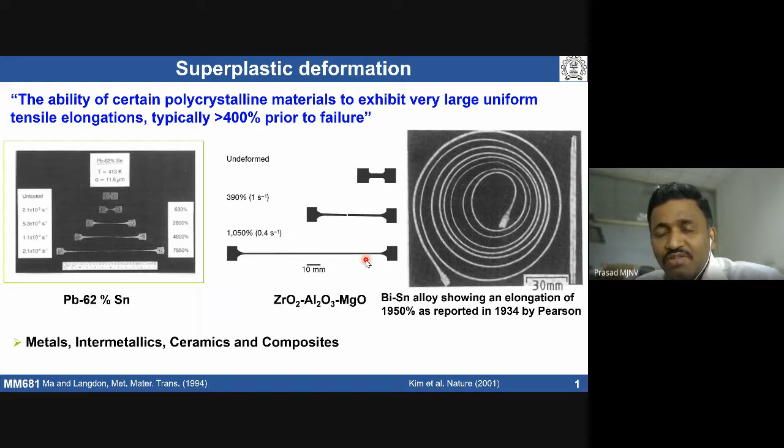The requirements for superplastic phenomenon are basically elevated temperature, fine and stable grain size, high strain rate sensitivity, and resistance to cavitation. These are important conditions the material should exhibit so that we can see superplastic deformation in materials.

If we talk about characteristics of superplasticity, when you deform material at elevated temperatures, usually the materials follow a high temperature constitutive equation at low stresses. This is a typical constitutive equation we see in both creep and superplasticity.

If we talk about characteristic features, making a plot of stress versus strain rate at a given strain and temperature, typically the stress varies in an S-shaped curve. Whereas ductility, or strain rate sensitivity, as a function of strain rate, varies in the form of a bell-shaped curve.

There are three regions: region 1, region 2, region 3. Region 2 is the superplasticity region, which comes from high contribution from grain boundary sliding. Grain boundary sliding contributes to large strains, so a large amount of strain can be obtained.

But when there is grain boundary sliding in a material, discontinuities are going to generate. Those discontinuities have to be minimum, then only you can get large elongations. That minimum discontinuity can be obtained by having some accommodation mechanism.

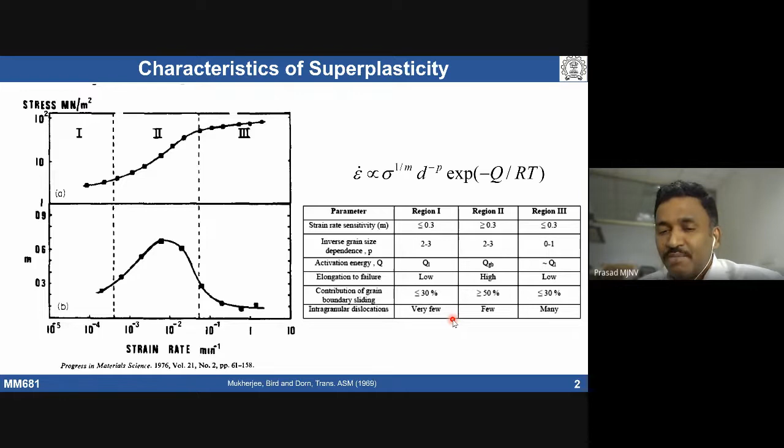The accommodation mechanism can typically be diffusion creep or dislocation creep. Accordingly, we see two different types of mechanisms: Lifshitz sliding and Rachinger sliding. If grain boundary sliding is accommodated by diffusion creep, we see lifshitz sliding, where grains get elongated. If grain boundary sliding is accompanied by dislocation creep, we don't see much change in grain shape - that is called Rachinger sliding.

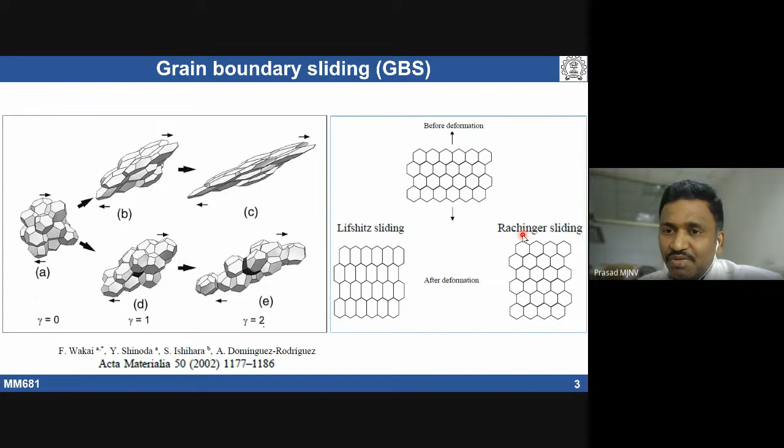So I think these are the things we had discussion about. Then we also discussed the effect of grain size. Typically, with refining grain size, we can get high strain rate superplasticity, which basically means greater than 10 to the power minus 2 per second. If I want to get high strain rate superplasticity, one has to refine the grain size, but at the same time that fine grain has to be stable at deformation temperatures. Then we can get large elongations before failure.

So I think this is about the superplasticity we discussed in my previous lecture. Are there any doubts regarding superplasticity?

Okay, so if there are no doubts, I hope I'm online. Yes sir, you are online. Okay, fine.

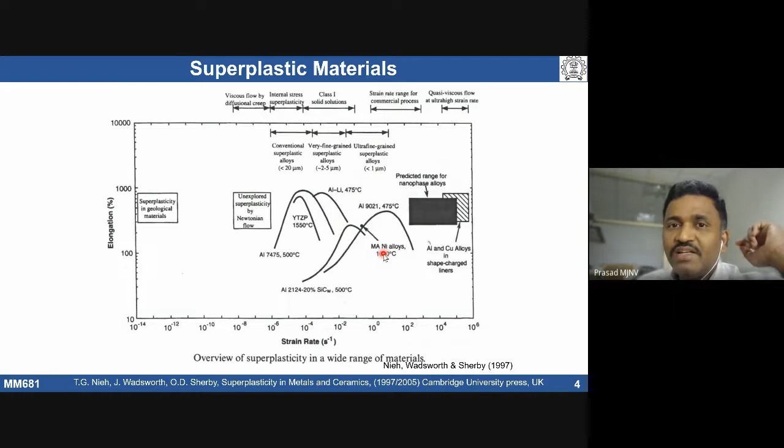So today's discussion is basically related to dynamic deformation activities. If I take a polycrystalline material, assume that it is an equiaxed structure.

If we deform the material, it can have a deformed microstructure like elongated grains. When these have a deformed microstructure, if we heat it to some temperature, it can undergo static recovery - that means whatever dislocations have been generated within the grains can get recovered. Or we may also see recrystallization of the grains, where a fully recrystallized structure can be obtained.

During deformation of a polycrystalline equiaxed microstructure, it will undergo typically elongation. This elongated microstructure can recover during deformation itself, or it can also undergo recrystallization, and you can get a fully recrystallized microstructure. So whatever happens, recovery or recrystallization, these are phenomena which can occur.

If they happen during deformation itself, we call them dynamic deformation activities. Dynamic recovery and dynamic recrystallization are dynamic deformation activities. Whatever changes happen during deformation in the microstructure, those are called dynamic deformation activities.

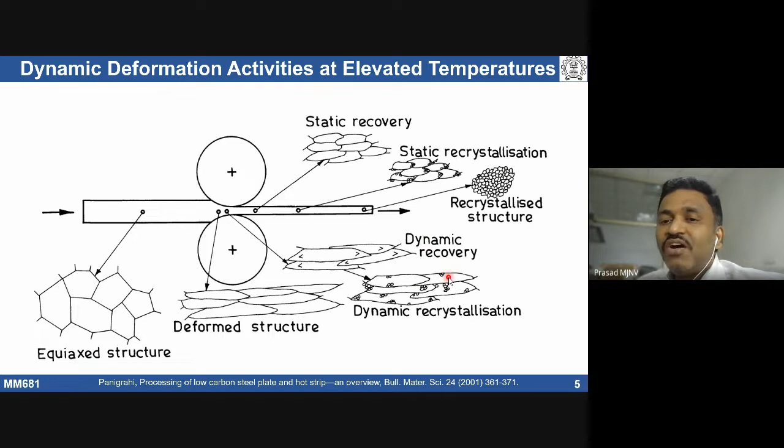So when you deform material at elevated temperature, high temperatures above 0.5 of the melting point, one can expect during deformation itself to see recovery and recrystallization. So these are called restoration processes, dynamic restoration processes. For example, if I deform a material under tension or compression, whatever.

So when you deform a material, depending on temperature and strain rate combination, and depending on microstructure of the material, we may see work hardening, or we may see work hardening plus dynamic recovery, or we may also see work hardening plus dynamic recrystallization.

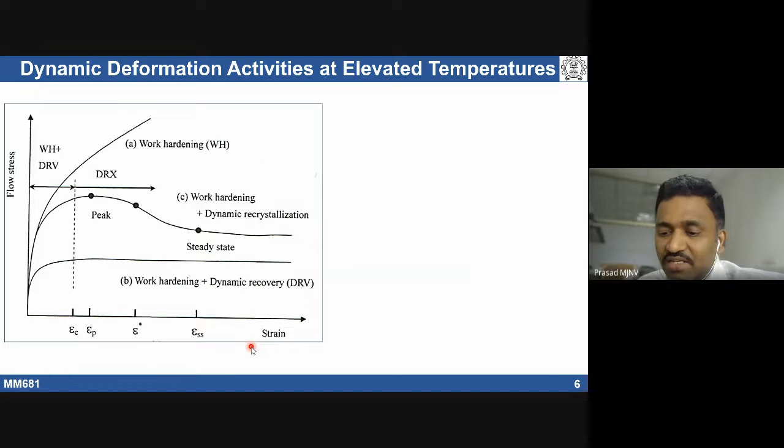So these are basically as far as dynamic restoration processes are concerned. During plastic deformation, we do talk about dynamic recovery and dynamic recrystallization. These two come under the category of dynamic restoration process.

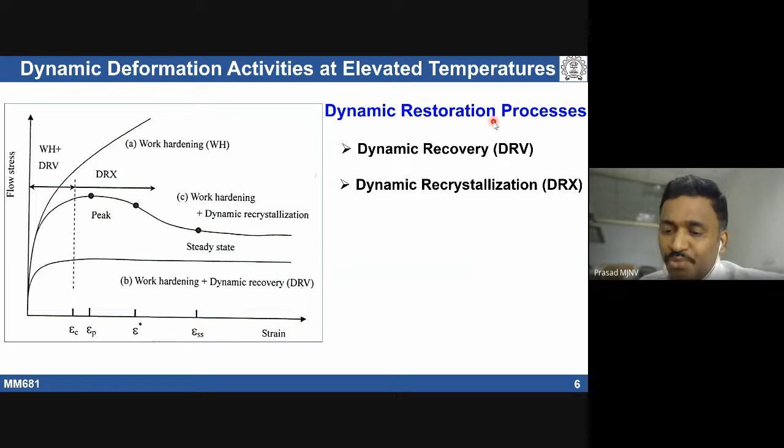So coming to dynamic recovery, the stress strain curve will be like this. What does it mean? Initially there is work hardening followed by a balancing act. The stress basically becomes almost saturated, getting to a steady stress state. What does it mean?

There is recovery, and dynamically there is recovery and deformation and work hardening together happening. So there is a balancing thing happening, that leads to this kind of steady stress state condition with increasing strain further.

So initially there is strain hardening because of dislocation density, and we do see formation of subgrains when you deform material at high temperatures. Initially cells form, then those cells can convert into subgrains. So what happens once we have a subgrain structure?

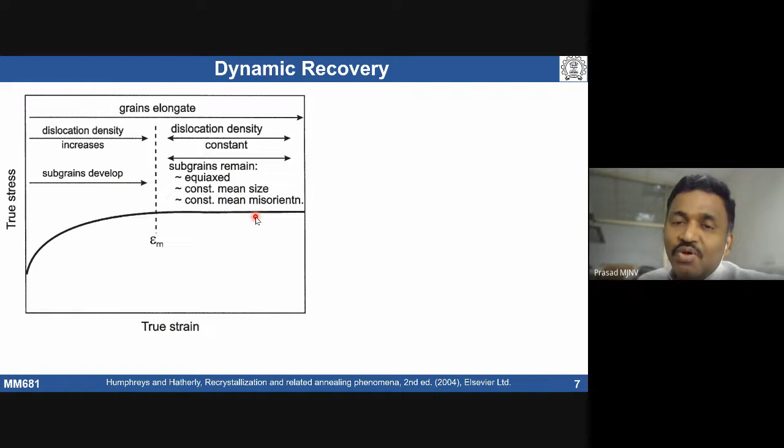Dislocation density becomes almost constant, and these subgrains remain equiaxed and have an almost constant mean grain size, with mean misorientation less than 15 degrees - low angle boundaries. The subgrains will be having low angle boundary character.

So the mechanism by which the subgrains are going to form is basically called polygonization. The mechanism of recovery is basically given by a polygonization mechanism. For example, when you deform a material, there is a lot of dislocation density generated.

And if you take different planes, we do see different dislocations. So what happens during thermal energy - when some thermal energy is provided - dislocations of opposite sign are going to get annihilated easily because of easy kind of deformation activity during deformation, or even with heat.

Dislocations of opposite sign are going to get annihilated, and same sign dislocations are going to form boundaries, get aligned and form a boundary - low angle boundaries. So this is called subgrain formation, formation of a subgrain.

So this whole process basically can happen in static conditions after deformation - if I take it to some temperature, recovery can happen - or during deformation also we can see formation of subgrains. If it happens during deformation, it's called dynamic recovery. If it happens statically, only with temperature, that is called static recovery.

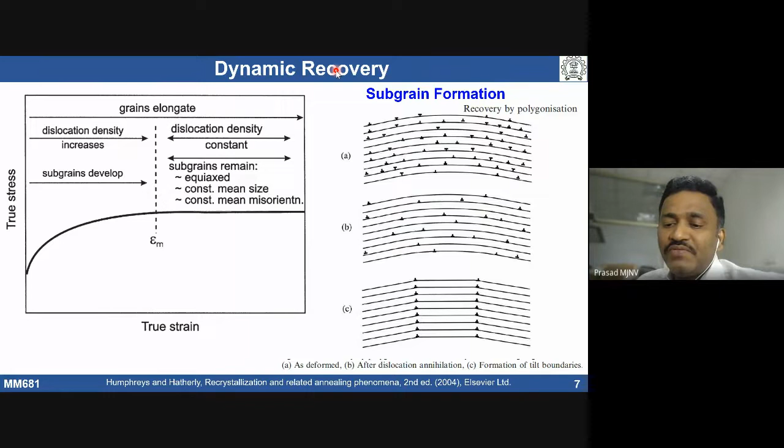In dynamic recovery, new grains are not getting formed, only elongation within the elongated grain structure. We do see subgrains form within an elongated grain. During deformation, dislocation tangles form, cell formation occurs, and these cells can convert into subgrains. Opposite dislocations get annihilated, while same-type dislocations lead to formation of a subgrain. If you take one grain, within that grain I will see formation of subgrains. Subgrains will have a low angle disorientation.

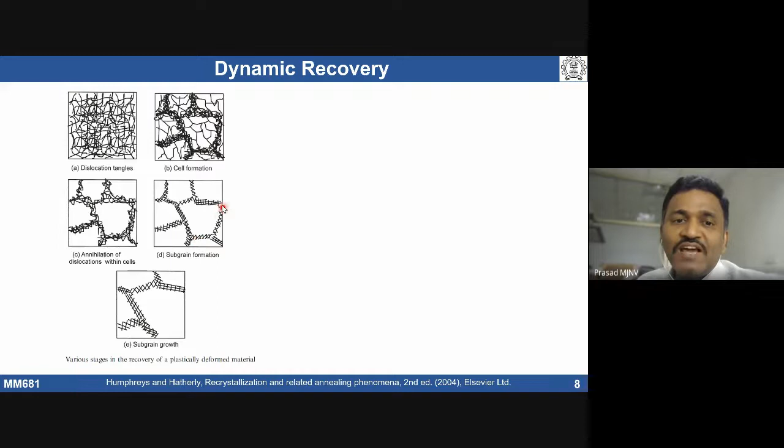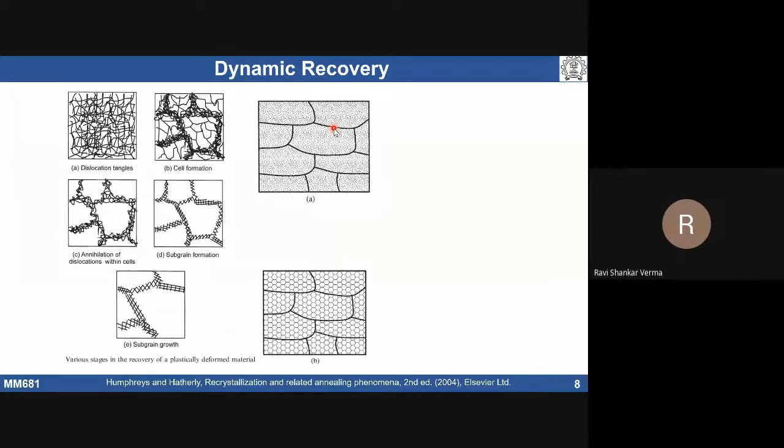That is why it reduces the work hardening process, because further dislocation density generation has come down due to annihilation. So recovery is taking place. Dislocation density is going to return, because again development of dislocation is going to get generated, and we do see some kind of work hardening coming from this subgrain.

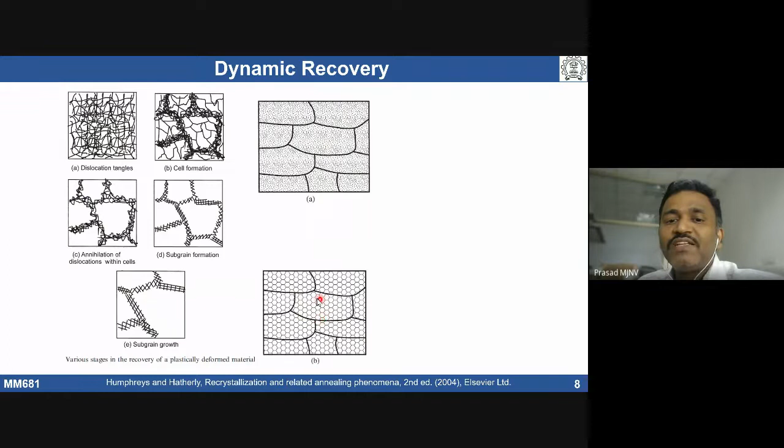So initially we have a deformed microstructure. If we talk about static recovery or dynamic recovery, what happens? This dislocation is going to get rearranged and can form several subgrains within a prior elongated grain structure. This is called dynamic recovery. If we look at the misorientation, typically on a TEM, within a grain we see multiple fine grain structures which are of a low angle grain boundary character.

Is it clear? Yes sir. Sir, in picture B, the dislocations that are there inside the boundaries, those are getting annihilated, right?

Yeah, see what happens, this is the kind of structure. Initially we have one grain. We'll have dislocations entanglement, that's called strain hardening. With some amount of further strain, we see formation of a cell structure. So within these cells, whatever dislocations of opposite sign are at the boundaries, those are going to get annihilated, leaving dislocations of the same sign that can lead to one kind of boundary. Subgrain boundaries are going to form.

So this is like... yeah, so the dislocations that are there inside those boundaries, those are getting emptied now. So those dislocations have got annihilated, right? Yes, this is also going to get inside. If you have some dislocations of opposite sign, they are also going to get annihilated on the same plane. That's how it comes.

That leaves basically reduced dislocation density. Overall dislocation density is going to get reduced. Here we have a large dislocation density; if the subgrains form, reduced dislocation density is going to happen. However, with further deformation, dislocation is going to get generated and subgrains are going to form. So that basically balances your dislocation density in the material during deformation.

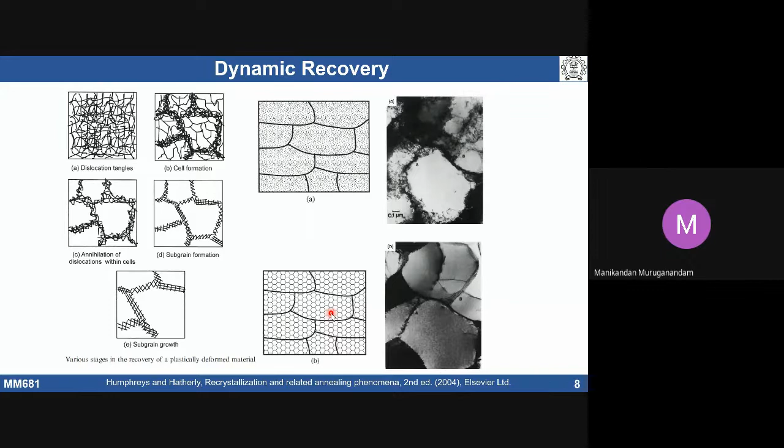Okay, okay sir. Yeah. So generally when they explain recovery, they say it is in bending or in tension. So what happens in compression kind of deformation?

No, see, it happens during compression, during tension also. Whenever there is a gradient, okay, that was shown for bending like a gradient. Whenever there is a gradient, we see formation of it. That's the polygonization kind of mechanism being used. But when you deform materials, compression or tension, wherever there's a gradient, that can lead to formation of subgrains. It's a strain gradient. When you talk about bending, there is a strain gradient from tension to compression. Even within tension, when you deform material, we may see some gradient in dislocation, a strain gradient. At some places we may see higher strain, other places lower strain. So that gradient is going to exist in the polycrystalline materials.

Okay sir, thank you. Okay.

Okay, so this is basically dynamic recovery or static recovery. If it happens, everything happens during deformation, it's called dynamic. Otherwise, it's static. When you heat the material, recovery can also happen.

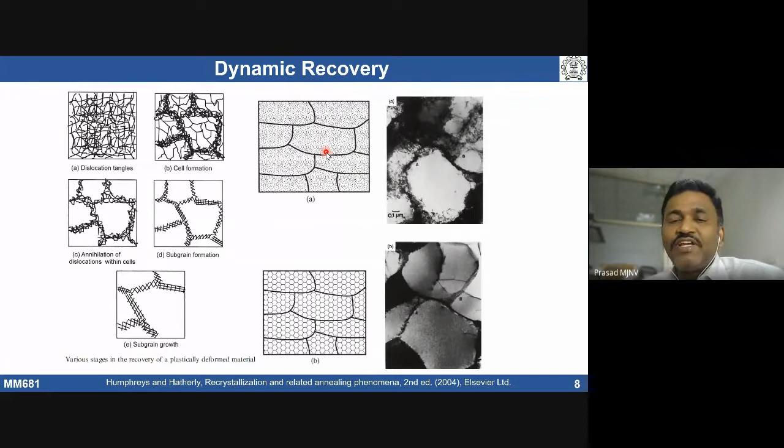So when you talk about dynamic recrystallization, there are actually three different types: continuous dynamic recrystallization, CDRX, discontinuous dynamic recrystallization, and the third one, geometric dynamic recrystallization. So there are three different types: continuous DRX, discontinuous DRX, and geometric DRX. Now if we talk about continuous recrystallization...

Is it coming to everybody? Yes, sir. Yes, sir. Yes, sir. Just one minute. How about now? Is it still there? Okay.

So when you talk about dynamic recrystallization, there are three different types: continuous DRX, discontinuous DRX, and geometric DRX. The continuous DRX is also called progressive transformation. What it means is, initially we see recovery, then followed by recrystallization.

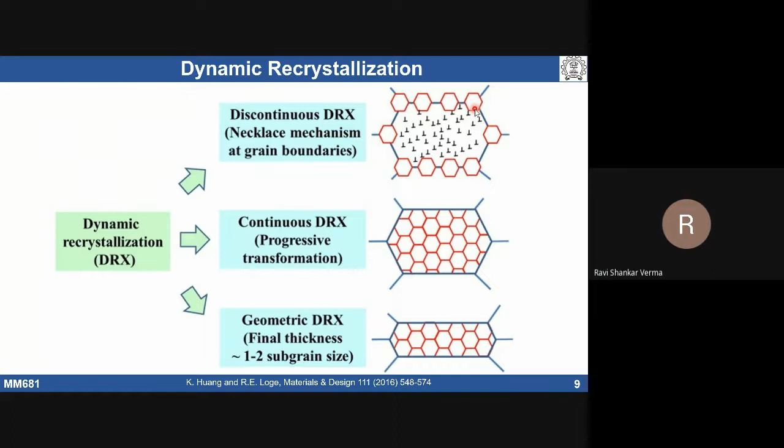Okay, understood sir. This geometric DRX is observed only at very large strains. Okay, I think I won't spend much time on that. Let me just introduce the different types of DRX.

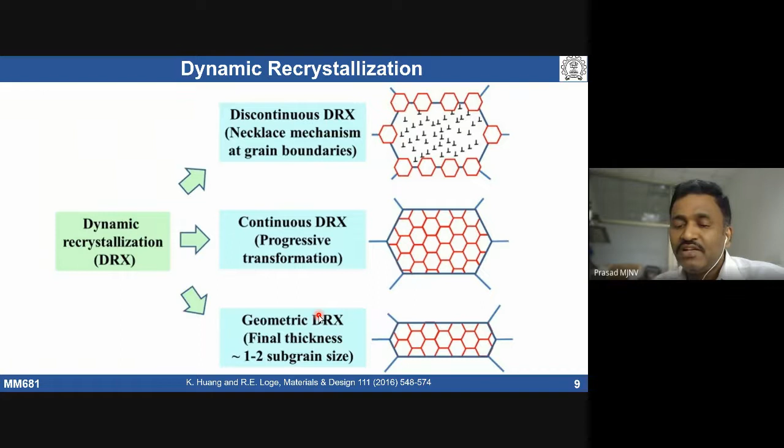When you talk about continuous DRX, the features are: initially there should be the stress-strain curve showing recovery, and with more and more strain, it's going to get extended. That's why it's called extended recovery. The shape of the curve is going to be like this.

Depending on temperature and strain rate, with increasing temperature or decreasing strain rate, your stress requirement is going to come down. The stress requirement for recovery to happen, what you are seeing as the recovery kind of CDRX thing, basically lowers. The stress for recovery is going to lower.

At the same time, initially we are going to have subgrains. Subgrains will have a low misorientation angle. With more and more strain, we do see development of high angle grain boundaries, which are going to get generated.

If you look here, the initial grain size - we have very coarse prior grains. When you deform it, with further deformation, we do see a steady state kind of grain size is going to be developed. What is the effect of grain size?

If you refine the grain size - now my starting grains, one is actually 100 micrometers, the other is 10 micrometers - the final grain size is immaterial. What you are getting is the same. It's not going to be dependent on your initial grain size, the final grain size.

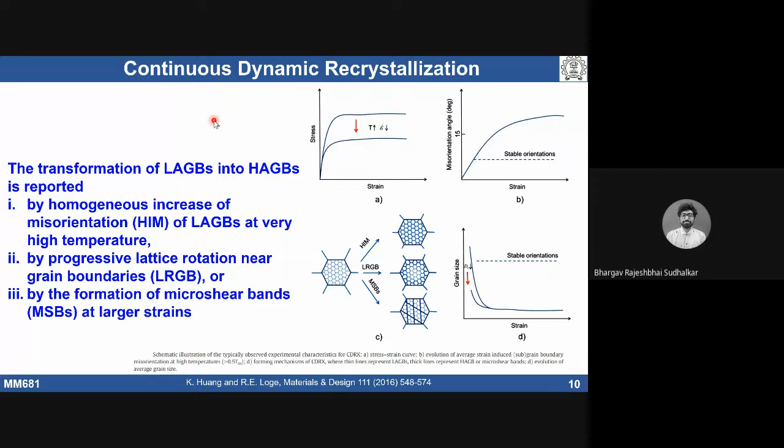Also, when we talk about discontinuous dynamic recrystallization—I'm yet to come to this, just like continuous dynamic recrystallization. The next slide is basically related to discontinuous dynamic recrystallization.

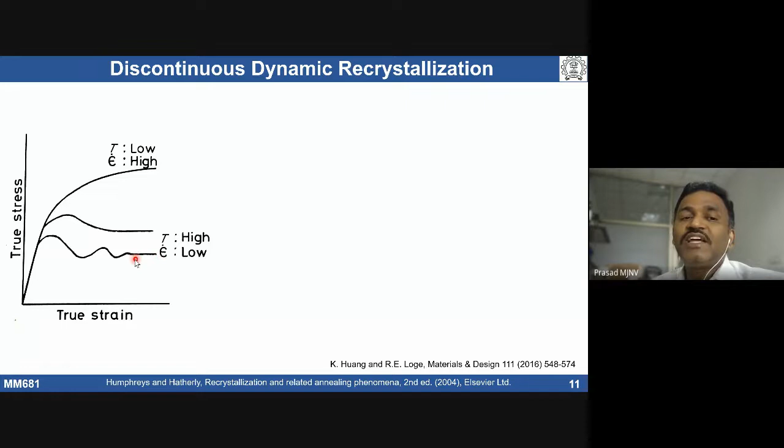This has a characteristic feature in the stress-strain curve. If we talk about CDRX, it simply looks like a DRV, dynamic recovery kind of curve. But in case of discontinuous dynamic recrystallization, it is a strain hardening, work hardening kind of thing. When there is discontinuous DRX, we can see a peak followed by a drop in stress, then again a steady stress. Or we may also see some serrations in the stress-strain curve, followed by some steady stress.

Initially, recrystallization will initiate at some temperature. There's an onset, a critical strain required for recrystallization to take place, because we need to provide some amount of driving force. Only then do we see formation of recrystallized grains. More and more recrystallized grains form with further deformation, which can lead to a fully recrystallized grain structure.

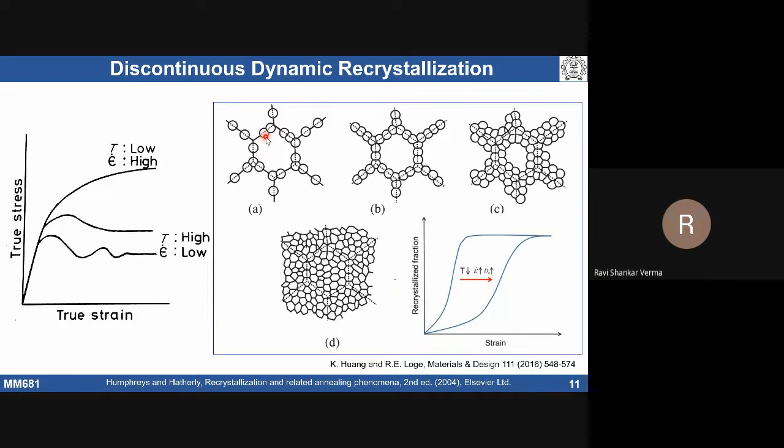So fraction means as against the original grains? Now see, for example, from A to D, did the fraction of recrystallized grain increase or decrease? It is increasing—that's called fraction. We are considering it with respect to the prior volume of material. In that particular volume, we are defining what percentage of space the recrystallized grains are taking—percentage of volume fraction, or area fraction of the grain.

So the recrystallized fraction can range from 0 to 1, meaning 0 to 100% can happen. It's basically dependent on strain. Usually with increasing strain, the recrystallization fraction is going to increase, and it also depends on temperature, strain rate, and initial grain size. So at a given strain, if you have high temperature, low strain rate, and fine grain size, this can lead to a higher recrystallized fraction.

Is it clear? So I said there's a typical stress strain curve for a material which undergoes DDRX. Initially we see strain hardening, then there is a peak stress followed by a drop in stress, then it gets saturated and becomes steady state. So we get a steady state stress with strain.

There is a critical strain at which recrystallization, DRX, is going to get started. That is called epsilon C. At a critical strain, the recrystallization gets initiated, then there is a peak stress. Afterwards, the recrystallization fraction is going to increase. After a certain amount of strain, we see a steady state getting established.

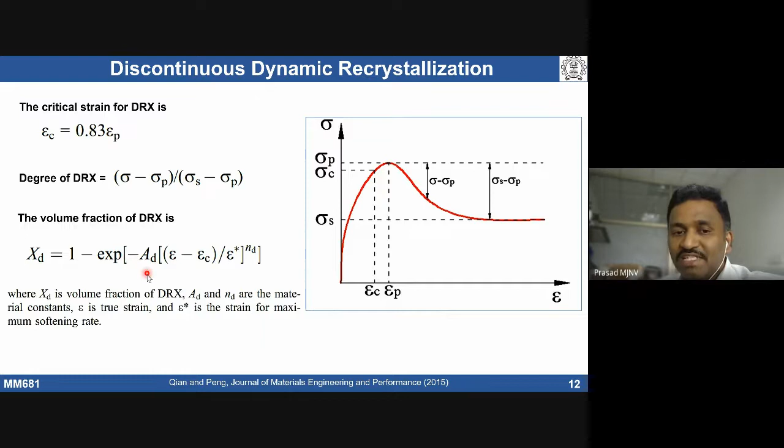And if we talk about volume fraction of DRX, people use an Avrami type of equation, where the volume fraction of DRX can be expressed as 1 minus exponential of minus AD, where AD is a constant and nd is a material constant, times epsilon minus epsilon C by epsilon star. So at a given strain, what is the volume fraction of DRX? One can establish that using this equation.

One has to know epsilon C and epsilon star. Epsilon C is the critical strain for DRX that can be known from the peak strain - the strain corresponding to peak stress. From that we can know epsilon C and epsilon star. Epsilon star basically tells the strain for maximum softening rate, the strain at which maximum softening rate is happening. If I know epsilon C and epsilon star, I can know at a given strain what is my volume fraction of DRX, the dynamically recrystallized grains fraction. Is it clear?

Hello sir, is it clear about this? Yes sir, it is okay, clear.

Without looking at microstructures, if I have this typical characteristic stress strain curve, one can actually know the degree of recrystallization and volume fraction of DRX. The dynamic recrystallized grain fraction can be estimated at any given strain.

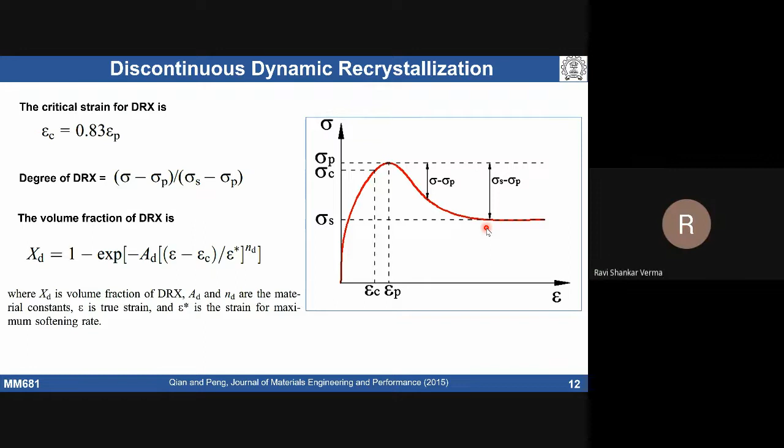Yeah, we need to take a work hardening plot. Theta is equal to d sigma by d epsilon, as a function of strain, if you make a plot.

For example, we have a stress strain curve like this. This is the effect of deformation temperature and strain, we get this kind of stress strain curve in a particular steel. It was established - if I make a plot for this stress strain curve, theta versus sigma, or theta versus epsilon, we do get a maximum softening.

That means theta becomes negative. Where is the maximum softening? That's basically maximum magnitude in negative value. That corresponding stress, we can get what is the strain. So that basically gives you strain for maximum softening rate.

And epsilon p is basically the peak where d sigma by d epsilon equals 0. When we get a peak, the slope is 0, d sigma d epsilon equals 0, epsilon p we get it. Once you know epsilon p, you can know what is epsilon c. So this is how people use stress strain information to understand and estimate what is the DRX fraction or degree of DRX in the material.

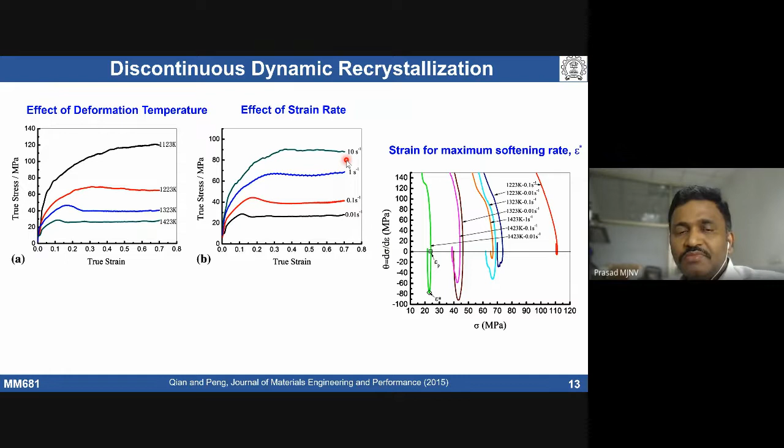So the discontinuous dynamic recrystallization, we said we may see a single peak or some kind of oscillations in a stress strain curve followed by a steady state - there is a peak followed by a drop in stress, then again steady, saturated stress, or we may see some serrations in the material.

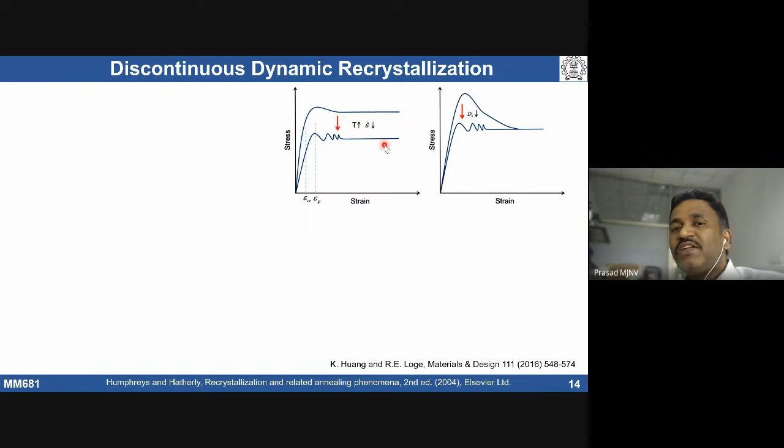It depends on your parameters like temperature and strain rate. With increasing temperature and decreasing strain rate, we may see these oscillations in the curve. Similarly, with refining grain size - coarse grain and fine grain - with refining grain size, we may see oscillations in the stress strain curve.

So in order to account for both temperature and strain rate, we use Z. What is Z here? Can anybody say? You are basically taking into account both strain rate and temperature effect. What is Z? It's the Zener-Hollomon parameter, which accounts for both strain rate and temperature.

So that means depending on Z and your prior grain size, the type of stress strain curve you are seeing can vary. So one can actually make a master plot, Z versus initial grain size.

Typically there is a boundary established for a given material. So what does it mean? At a given initial grain size, higher Z leads to a single peak, lower Z leads to multiple peaks. When I say lower Z, that means lower strain rate or higher temperature - lower strain rate or higher temperature can lead to multiple peaks.

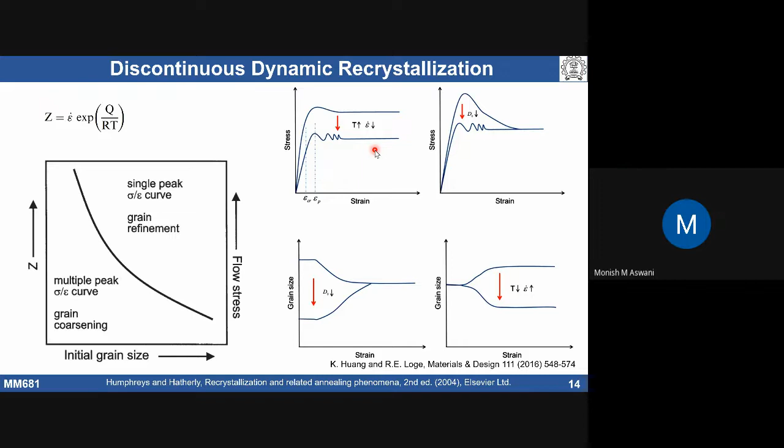That's what - okay, check this serration. Even if you remember, serrations can be seen due to different things - when there is twinning, when there is dynamic recrystallization, apart from what we are seeing in DSA. This is a high temperature phenomenon, where at this temperature we don't see the kind of pinning and unpinning action. This is at a temperature you're talking about 0.5 times the melting point or above - it's nothing to do with DSA.

That's what one slide I showed you - what conditions we do see serrations in the stress strain curves. This is one of the things that can also represent stress strain curve behavior. The stress strain curve can have serrations apart from DSA - twinning, yes sir, phase transformation - those things can give rise to this kind of serrations. Any other doubts?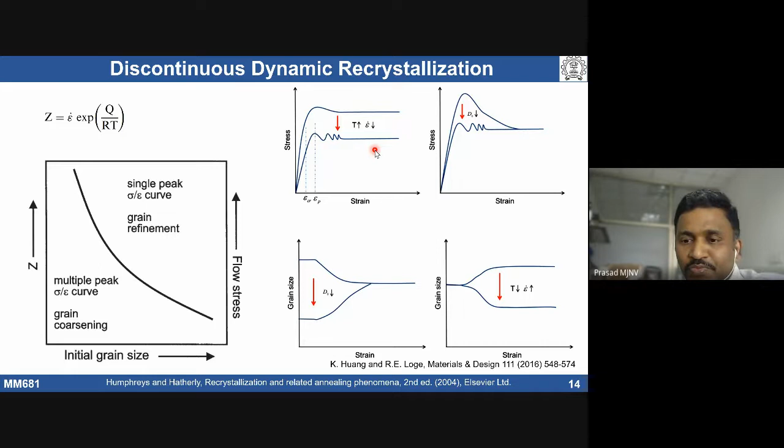Typically, if I talk about discontinuous dynamic recrystallization, the grain size, the average grain size you get, the final recrystallized grain size is almost constant. That means you get nearly the same recrystallized grains even when it becomes 100% recrystallization.

So there is a law called Derby's law, which basically tells that the average or mean grain size of a recrystallized grain during dynamic recrystallization is going to depend on Z. Z is basically the Zener-Hollomon parameter. Lower the Z, your grain size is going to be... is it coarse or finer?

Lower the Z, coarser the grains. This is inversely proportional - D is inversely proportional to Z. You get a coarse grain. If the Z is high, you get a fine grain size.

So this is how people have established, after looking at various materials, especially for steels, it was well established that the mean grain size of recrystallized grain is going to depend on Z. It is almost independent of your initial grain size - you get a saturated, same grain size.

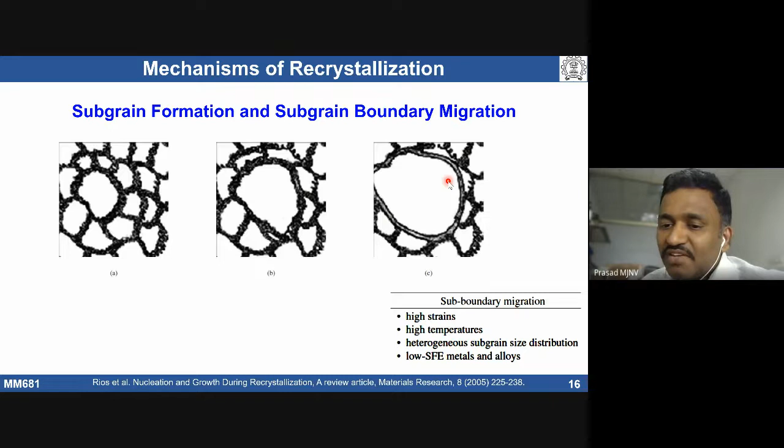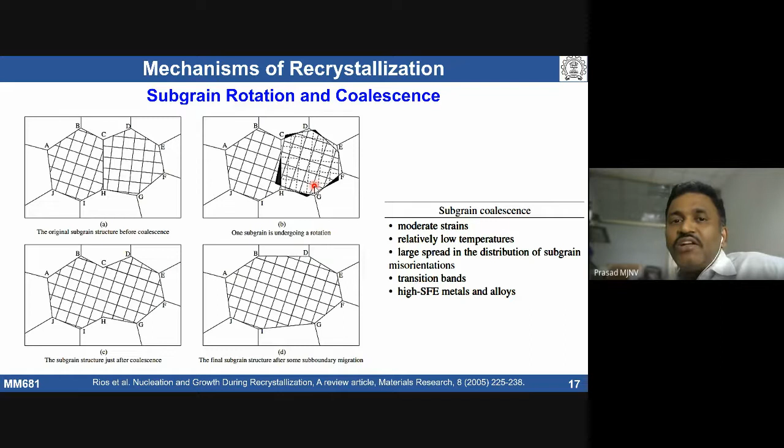These are the kind of mechanisms which can lead to subgrain coalescence in the material. So there's another important mechanism which happens during deformation. When you deform material at high temperature during hot deformation, the important mechanism is called strain-induced boundary migration.

Strain-induced boundary migration is called SIBM. What does it mean? Here, for example, we consider there are two grains, grain 1 and grain 2, and there is a change in energy because of dislocation density being different. Grain 1 has a different dislocation density as compared to grain 2 because of orientation effect, so the deformation of grain 1 will be different than grain 2.

Assume that the energy stored in grain 2 is higher than grain 1. So what happens? The boundary between grain 1 and grain 2, we do see some bulging kind of thing taking place. This bulging of a boundary takes place because of the energy difference.